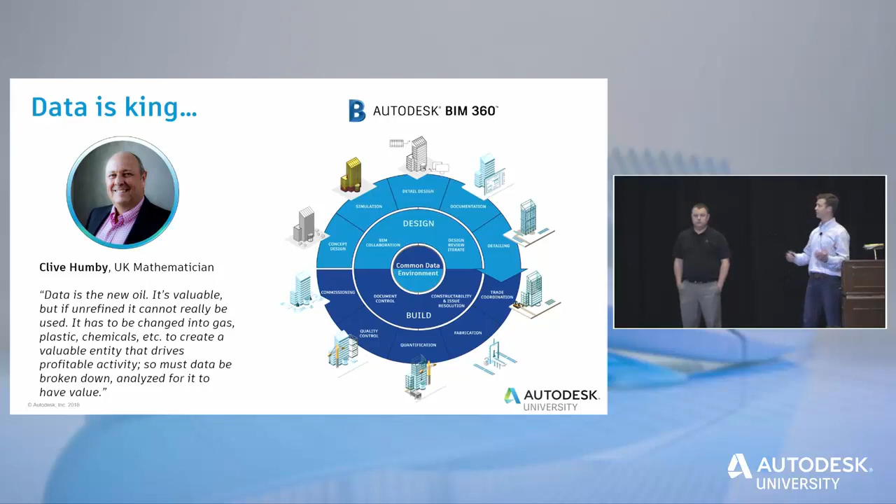I'm a big believer in this, and I think interoperability is one of the best ways to break down data silos. If you look at BIM 360, we've tried to create it as a common data environment, a CDE, with offshoots whether it's our products in-house or third-party applications pushing and pulling information in and out of our applications.

Historically, Autodesk has been a company focused on either building or buying software. We've made several acquisitions—Assemble is here today, one of our more recent ones. But we've also gone the path of starting to partner. This is a paradigm shift where Autodesk has realized we can't control everything in the world when it comes to AEC. Instead, we've decided to partner with all kinds of different applications across a vast array of workflows across what I consider the four pillars of a construction project.

Design, pre-con, building or execution, and then handover. This is kind of where we got things started. This was at AU in 2016. Our APIs were fresh out, and we turned to a couple of our customers to take it through a beta process and understand how they were leveraging the APIs.

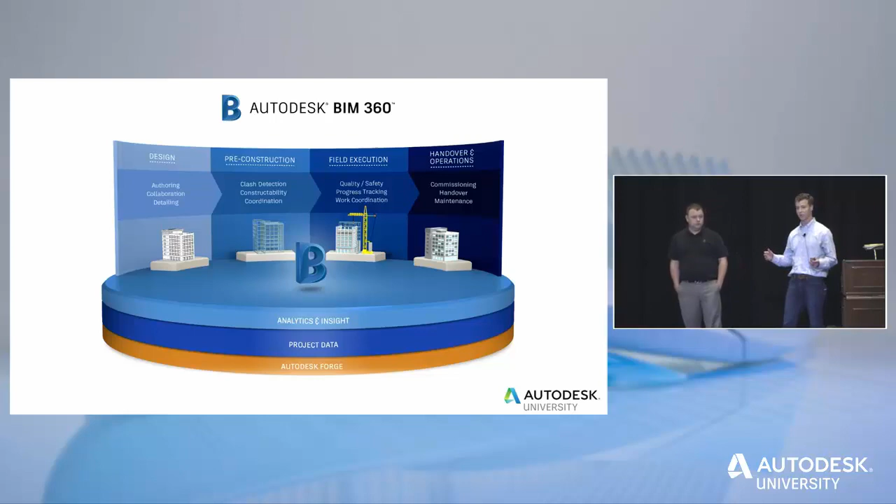Here's the construct of BIM 360 itself. Across the top you've got the different pillars of a project life cycle. You've got reporting capabilities, you've got the data, and all of that sits on top of Autodesk Forge. Forge is really just a host of different microservices—it's what connects everything across our applications.

If I look at it a little differently, think of that stack where Forge is sitting at the bottom of the tech stack—it's the lifeblood of what connects our applications. When you sit all the different BIM 360 applications on top of that, you've got a tremendous amount of tools you can use inherently inside the application or tie into. Depending on what the software you're looking to integrate with BIM 360 does, we feel like we've got 8 or so different great areas for interoperability.

That creates a pretty powerful tool that we then leverage our Insight tool to report on. Third-party applications have their own reporting mechanisms also. So let's go through the who.

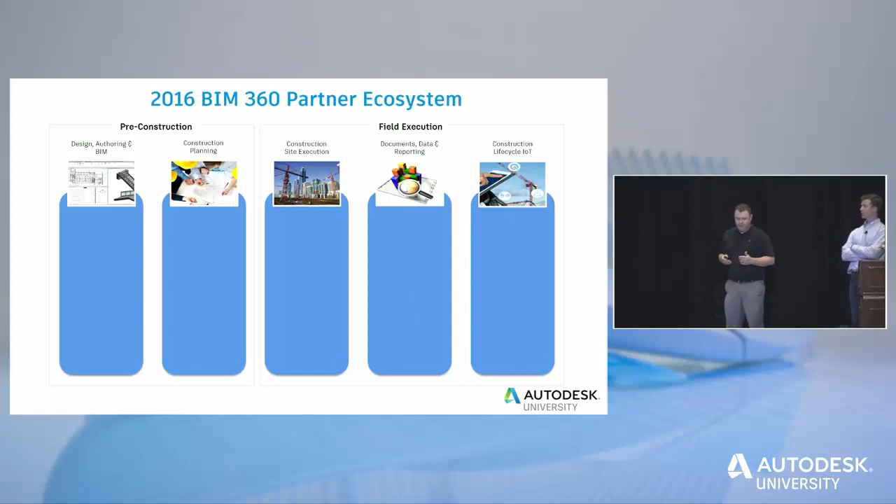Two years ago, like Josh just said, we had nobody. We rolled this program out—nice empty slate. Last year we had 21 live integrations at AU when we came here. Made a ton—that was all Josh Cheney and the team, the other people on this team weren't on yet. Now this year, here's our new tack: we have over 60 current live integrations into BIM 360 and many more on the horizon.

So the three groups we have today—the first one is Sigma Estimates. Love these guys, they've been with us since the start. They're my Denmark family, I actually went over and visited the Sigma Estimates team earlier this summer. They're using 5 different APIs in Forge.

The next one up is TopCon, an amazing group. We did a webinar with their team a couple weeks ago. They're leveraging 3 of our APIs. And then lastly, Assemble. Started out as a standalone solution, received some Forge Fund investment, and now they're an Autodesk company. So, invite Tim Kelly, newest member of the Autodesk family from Assemble, to go through some of the Assemble stuff and the new rollout of some of the BIM 360 integration stuff they've got going on.

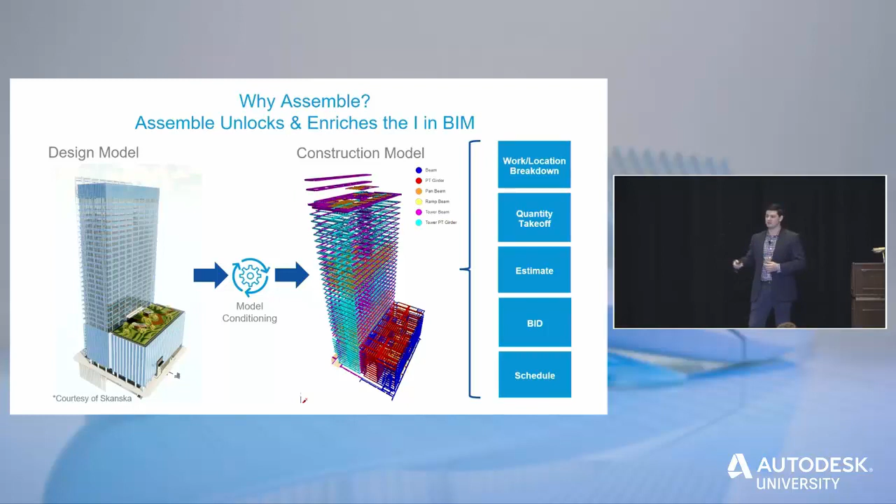So just a little bit more about the conditioning. With the conditioning, you're setting it up for those ad hoc pieces. We think today a lot different than we used to. When you guys would go on to, let's say, 2005, you go into Google, you have to provide a specific search to get to a specific website, to get to a specific set of an answer.

And that might be, what's the capital of Belgium? You needed to go find the city of Brussels. But now when we think about how we search for things, you're not interested in just that. You want the ancillary data. You want the Wikipedia page, you want the pictures, the places to go see things, the events happening, other things that are relevant to that search.

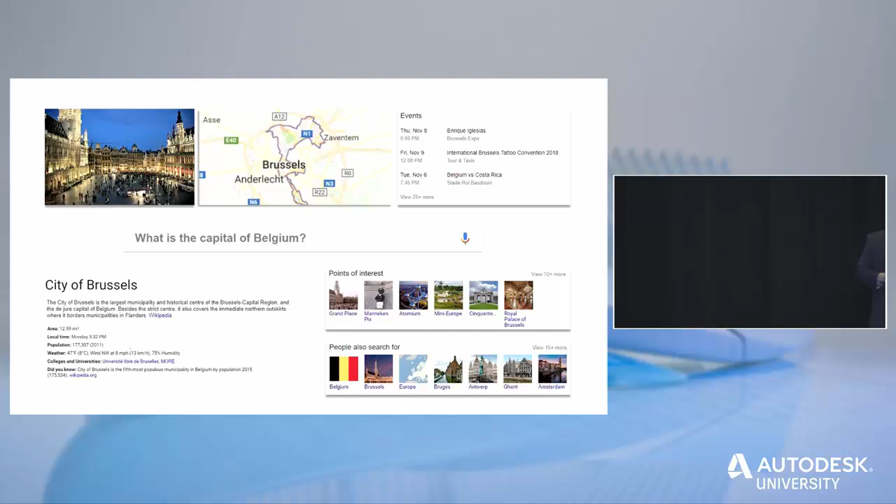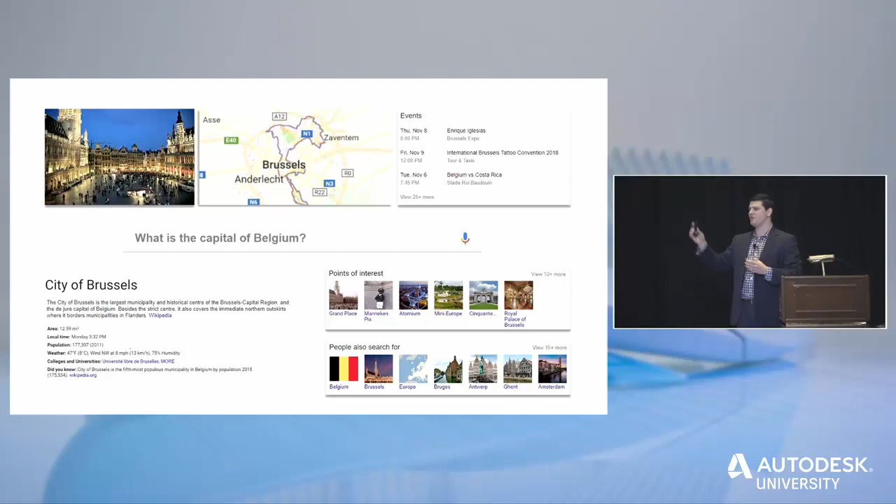And so our mind has shifted through this process of consuming data differently. We now know this information is accessible. So if you think about the top 10 Google searches, they're always really short and not specific, but it gets you to the information that you need. So let's translate that and think about that in terms of a job site, a model, or a set of project documents.

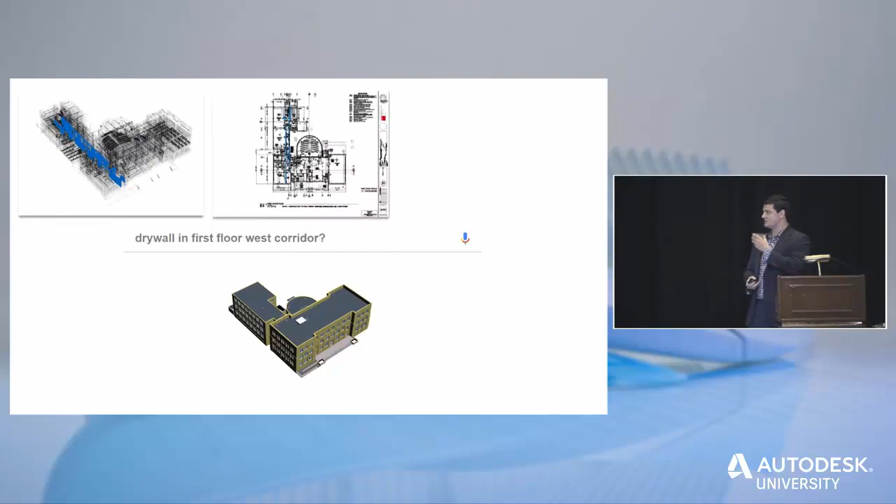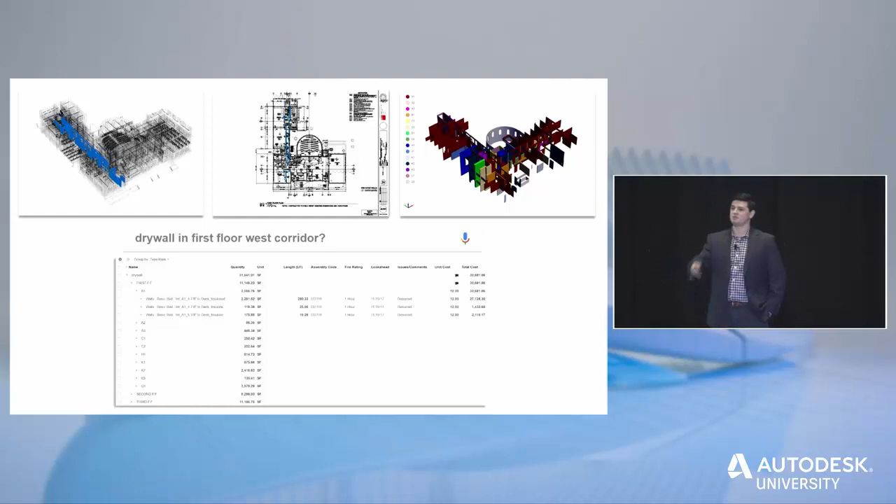What you might specifically need is the drywall located on the first floor in the west corridor. But you also want to see how that relates to all the other drywall. What are those other types? You might need the quantity information, but you might also want the fire rating, when it's supposed to be installed, or if it's even on site yet. So you have access to all that data seamlessly. You can navigate through, drill in deeper, add other information, and condition it further so the downstream effect is more information in the system, leveraged for more capabilities.

So I was really excited listening to both the intro and how the partnerships are evolving, and the other presentations talking about breaking down the silos, collaborating, communicating more. This is a total change from software development of the past, and now it's all very collaborative, wanting to work together to make sure contractors can do their work.

So as we step through the different pieces or parts of a project, means and methods, going through to understand exactly what's occurring on your job site, when it's occurring, the schedule, the breakdown, the views that you specifically need, you have to have a host for that. In the past, you could have created a really complicated coding structure that allowed you to connect the cost to your sheets or the cost to the schedule, but it was really difficult to follow that process. And now we have that object data, and we enrich that object data so you can leverage all these different pieces and all those different solutions in that space and move that data between those systems.

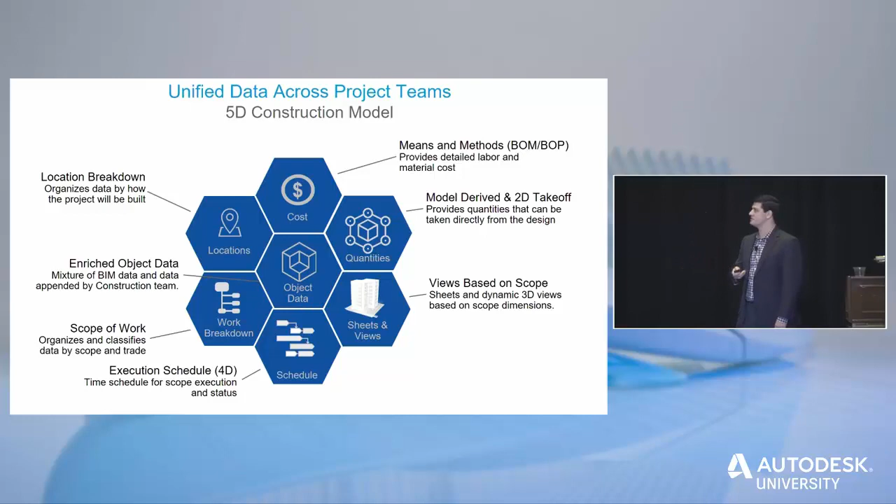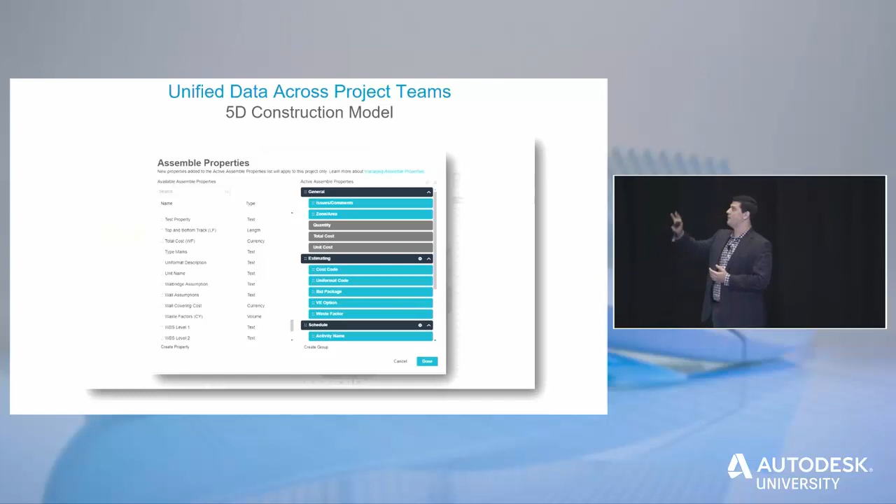So with Assemble, let's specifically focus really quick on the object data. Not only do we consume the properties that come out of the design team, the model, let's say Revit, we get the type properties, the instance properties, all of that data is consumed. We then layer on top of that any of the other information you want to contribute. So these can be strict text fields, cost code hierarchies, quantities or cost information, and we allow you to organize that data in a meaningful way for that project.

When you look at that within the context of a model and you're looking at a specific set of objects in the model, you can see that group of objects has this same set of data. So we know we've defined what the area is. We've got the unit cost and total cost associated. We've got the cost code structure, what bid package that's associated to. And now we can start to share this information out. As we organize this data, we leverage that information to group, sort, and filter, and then send out to the project team.

So with Assemble, our previous integrations prior to joining the Autodesk family were specifically related to sharing information to a bid room to provide additional context for your bid environment. Share information for project management, same thing, providing additional context for exactly what you want to see here. Sharing information to and from estimating systems, I'll get into that in just a second, as well as scheduling systems. We're actually leveraging API technologies in place in both BIM 360 as well as other solutions to push information back and forth between these softwares so you have the right data in the right place when you need it.

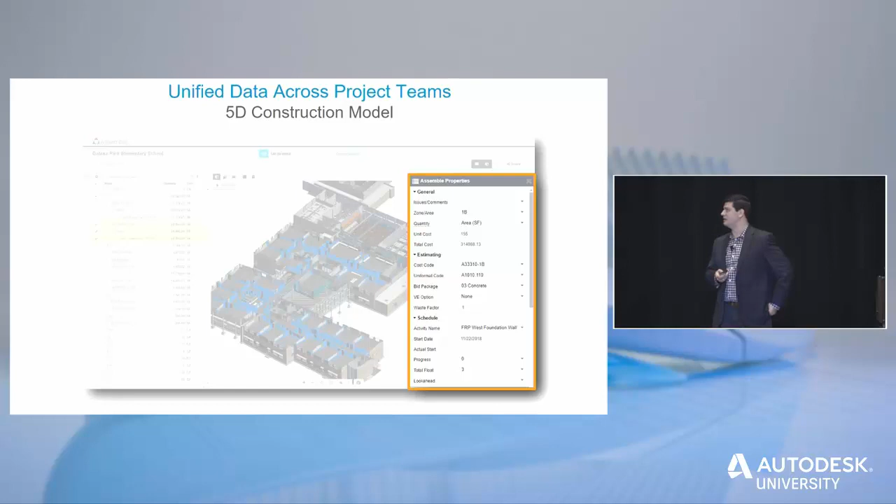So specifically on quantities and how Assemble leverages that data to organize things, I don't know if you guys can actually see this very well. But within Assemble, you have the ability to create a query, we call it a recipe, let's say. So we've specified exactly what we want to filter out. In this case, we're looking at the structural components, and we may have specified that we want both structural material as concrete and structural steel. We've then organized that information by specifying that we want to first group it by level, then by category, then by type.

And then we've ultimately color-coded to provide additional context there. This component, this piece, can then be pushed out to other team members.

Let's say you have someone that's very new to BIM or isn't interacting with BIM at all. They don't want to go in and understand what properties they must leverage to create that, like show me the walls on level 1. Ultimately, you can rely on others on your team to pre-create those views.

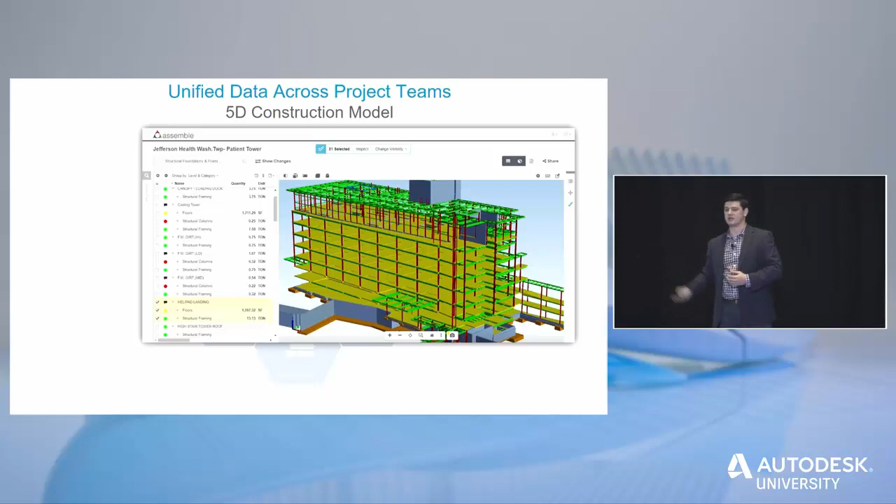You'll see a bit more on views in just a minute. But as you specify your specific quantity, you have the ability to say whether you want to use weight by linear foot, area, or volume, and you can specify which quantity driver you're leveraging as the primary unit versus all the other secondary units you have access to.

Jumping to sheets and views, a little over a year ago we actually released a process to publish sheets alongside your Revit model. So you have the ability to not only see it in 3D, but select that object in 3D and see exactly what sheet it shows up on and where in that sheet it is.

What this has started to push is an interaction where a number of users turn off the 3D altogether, and they interact with the inventory, the grid data, and the sheets. So they can step through their takeoff process by clicking on objects in the sheets instead of using the 3D at all, going through and validating the notes and specific information available there.

If you come by our booth, the Assemble booth, or the BIM 360 quantification pod, we're actually looking at the next generation of this and providing a 2D focus for estimators. That means the environment is geared more toward the 2D takeoff process than the 3D takeoff process. A lot of really exciting things are going on with how Assemble's technology stack backend interacts with that information and consumes it in a bidirectional way.

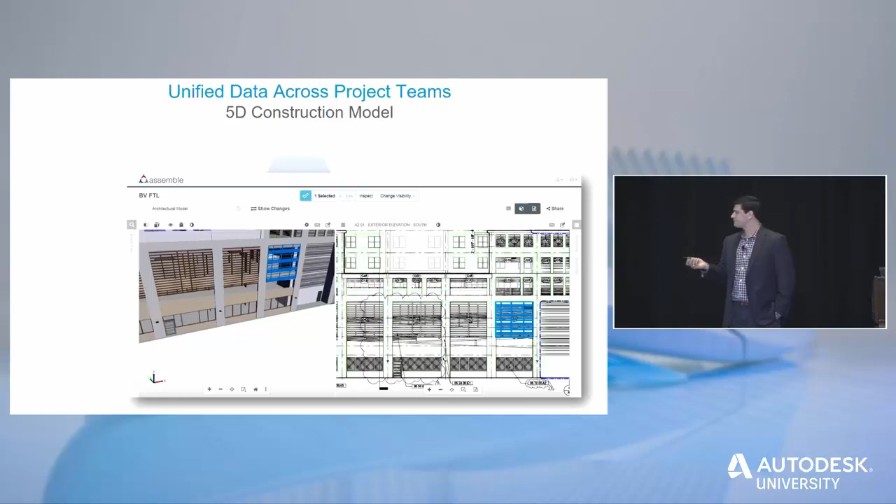For the views, this is actually the project landing page, and you can see on the left side there those are all the models published on a project. Within Assemble, each of those models isn't specifically a file. It's a container that can have multiple models or models that are broken apart, and that's a structure we keep within Assemble that allows you to publish revisions.

What we see our customers do is they'll consume data on a frequent basis so that they're actually creating a history of how that information changes.

What's great about Assemble, and this is one of the key things we did very early on, is provide the ability for a contractor to live outside of the central file, the common environment that the design team frequently shares, where they put the file up on Newforma or BIM 360 Docs or elsewhere that you have to go download, and you're in a different environment. You can't make changes to that.

So what we wanted to do is give contractors the ability to keep data consistently moving forward as that model changes. So as you push in new iterations of that file set or those models, you actually have the ability to have the data you've layered on top of that persist throughout version to version.

With our integration with BIM 360 Docs, as design teams push their information into Docs, there'll be a direct consumption from BIM 360 Docs into Assemble, so there's no downloading of files to publish from a local tool. That's a direct read, and that's something we'll be rolling out very soon.

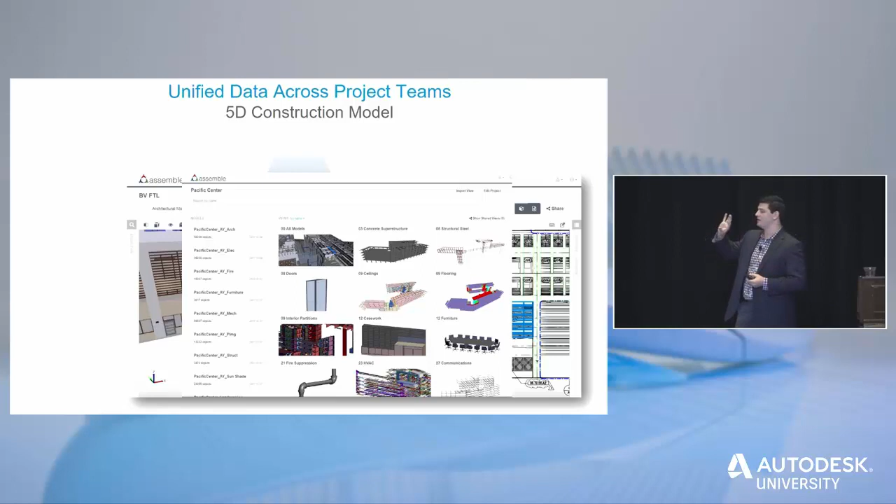Jumping off of the versioning and the models, the views I talked about a moment ago are organized in the main part of the page. Every team member on the project has access to these views. We wanted to be very specific about having this information commonly available. There are no view folders that bury views for private use, and users don't have individual views for themselves. Those views are created for the project team to collaborate on and share across the entire team.

Jumping out of the views and into our schedule interaction.

Within the scheduling component, we've gone through the process of integrating with P6 specifically. This is a bi-directional integration where I can go in and create links to my schedule activities and bring that data, any of that data, in from the schedule system into Assemble.

From there, you can leverage the Assemble mobile technology to provide feedback on actuals. When was this structural member installed? Any notes on that? And actually feed that information back into P6. What that allows for is a real-time update and a staging area for the scheduling team to incorporate feedback from the field.

So what you're getting back into P6 is not only information related to when it was installed, when it started, when it finished, but more detailed than the activity, you have the individual dates of each component. Alongside that, you have the quantities, and in this view we can see exactly what's behind schedule, what's complete, and what hasn't started yet.

As I mentioned before, I've been doing this in practice for a number of years, and I was a user of Assemble before I joined full-time as a product manager. I worked on a number of different projects, but specifically, Delta Airlines had my team build a terminal at JFK in New York City, and we leveraged this very heavily.

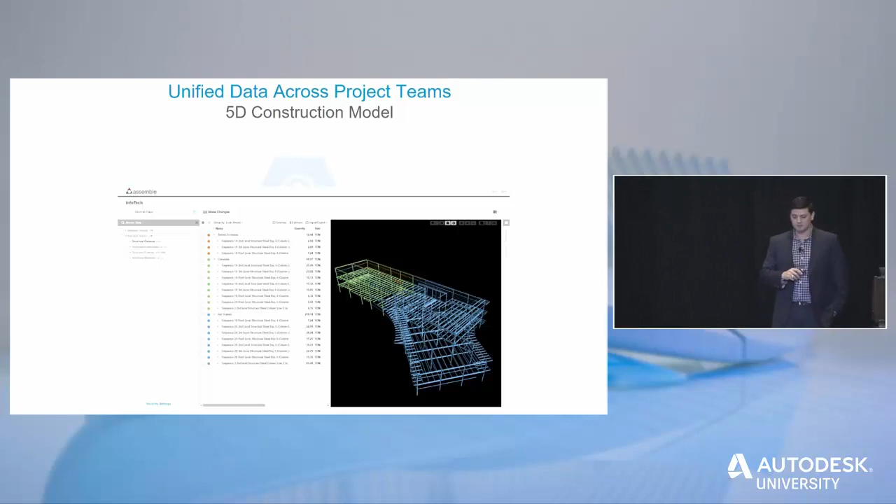Building on from the scheduling, as you incorporate that scheduled data, you can start to create engineering work packages, installation work packages, and assign those out to team members. So in this case, if we have an installation work package, we can get rid of absolutely everything else from the view except for what's relevant to that work package.

From there, you can drill into exactly what components and pieces are part of that work package and status them appropriately. This means that for those in the field who may not want to download the entire model and then navigate into exactly what they want to see, this package is specifically created for that workflow and gets rid of any noise that isn't part of it.

What you're going to start to see with our integration with BIM 360 is our views and the packaging we're doing here will start to filter into all of the other components of BIM 360. You'll start to see that views page come through and be part of BIM 360 docs.

You'll start to see some of these installation work packages filter through and become part of BIM 360 field, specifically around asset management. And you'll start to see this data shared, conditioned, and organized within each and every component from the pre-construction process through execution.

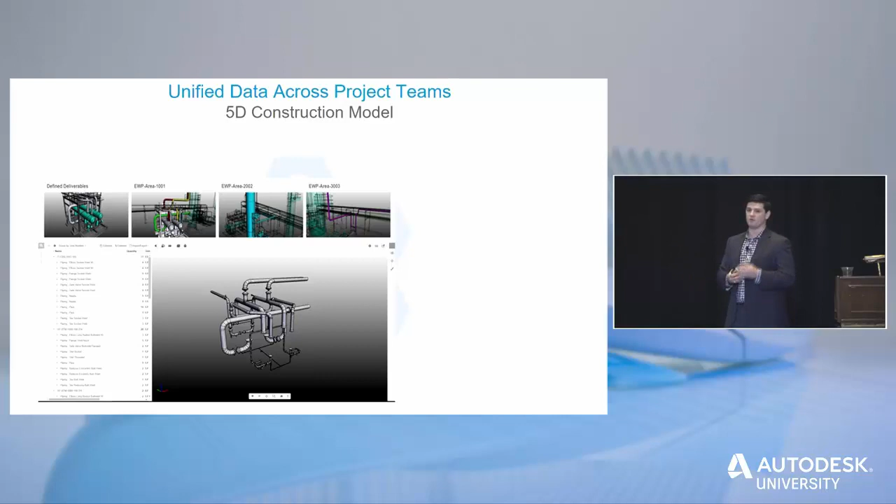Locations is yet another breakdown structure that is applied typically after you get a design model from the team, organized in a way that makes sense to how you're going to build it. This might be related to a specific skid and how it's organized to get delivered to site, or it might be how you want to break down your concrete pours.

But we have the ability to break apart the model and provide that content so that you can create that package or view that's relevant, so you understand what those boundaries are and how that's organized. The evolution of this with the location services provided by the BIM 360 team means that we'll start to bring in a core structure of breakdown that's applied across every component of your project.

Rather than just the model or the sheets, you have a location service that you can status things on. That status and information can then be filtered down into all of the components that are part of that location. Rather than needing to select 75 components within a given location, you can provide status or input on an overall room, area, or floor, and that feedback will filter throughout.

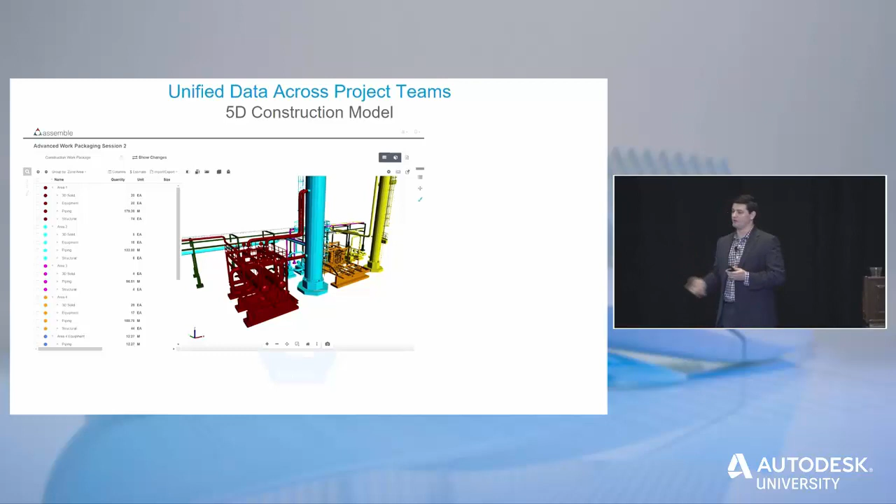With cost, within the Assemble platform we have an assembly-based cost structure to provide that quick ad hoc discussion around cost. You can incorporate cost at an object level or a roll-up from there, and leverage cost coding to directly import that. That will provide some detail, but not a lot.

In that case, we wanted to go interact with industry standards, and specifically we started with Sage. We built an integration with Sage that allows data from the Assemble platform to be pushed into Sage and leveraged to create the actual assemblies.

This integration works through a product called eTakeoff Bridge that loads your Sage estimate, brings in all of your database assemblies, brings in the quantities from Assemble, creates a memory mapping, and ultimately contains within the Sage line item all of the individual instances associated to it.

What that means for setup is there might be a bit of a process to map things to your assemblies. But if you do it once, you'll be able to provide that information iteratively. You publish a new version a week later, and a week later, and you're actually keeping track of exactly how the design is changing and how that can impact the budget.

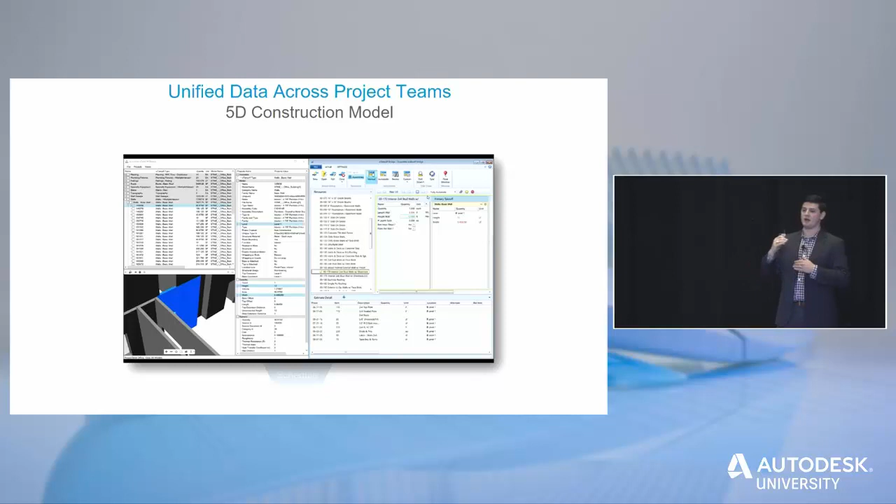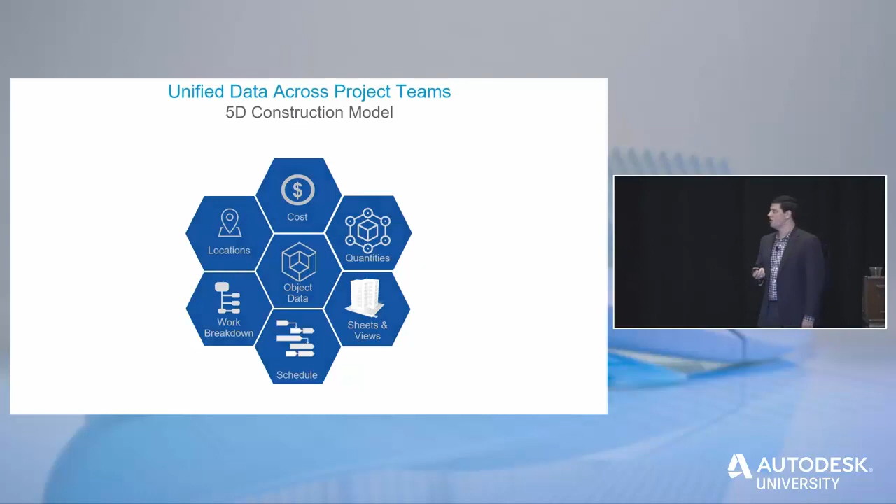We're working hard on that 2D, 3D inventory, incorporating things that aren't in the model, other elements into the design that may be a general note on a sheet that you need to keep track of as a line item, and you status that as you move through the project. We're working on incorporating that.

You need a uniform system for asset and material management, and that's going through the quantification module we're working on with BIM 360. That breakdown will be structured to allow you to share information between scope documentation and out to what labor and materials are associated with it.